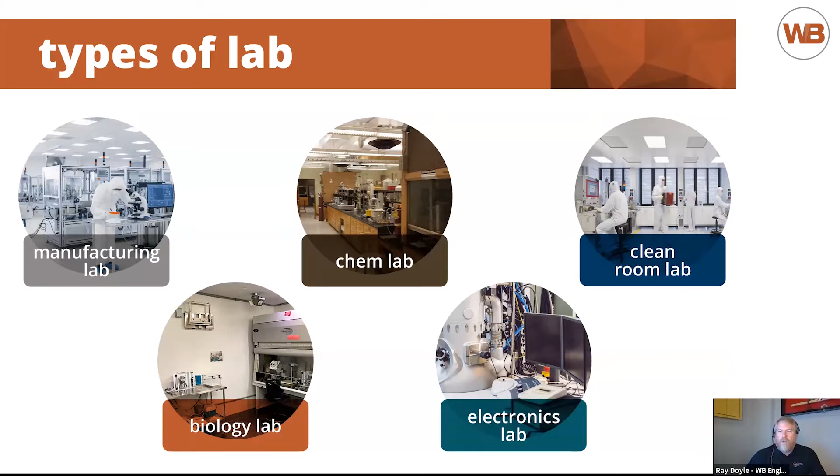So that brings us to the idea of understanding how tenants want to look at buildings, right? So why do we reposition an office building to a lab? Well, for people that own the buildings, they want to have a building that they can lease and make money on. Right now, with workplace in a little bit of a slow period, you want to try and find ways to reposition your buildings to increase their leasability.

The main thing that you have to remember is that when you're looking at a lab building, you're repositioning an office building to a lab to suit the needs of the market. So you have to understand the market. The market is a bunch of users on the science side that want to make sure they can do whatever they need to do to change their business and grow their business in the research, R&D, or manufacturing world.

So flexibility is key. It's really important that the folks that live in these labs and lease these buildings understand what they're leasing. To understand what they're leasing, they need to understand what type of flexibility, adaptability, adjustability, and expandability they have available in the building that they're looking at to lease.

So when you're repositioning a building, it's pretty simple to modify one use type, say from a tissue suite to a biology R&D space. But if you want to make it a chemistry lab from a biology lab, now you may have to adjust the exhaust systems.

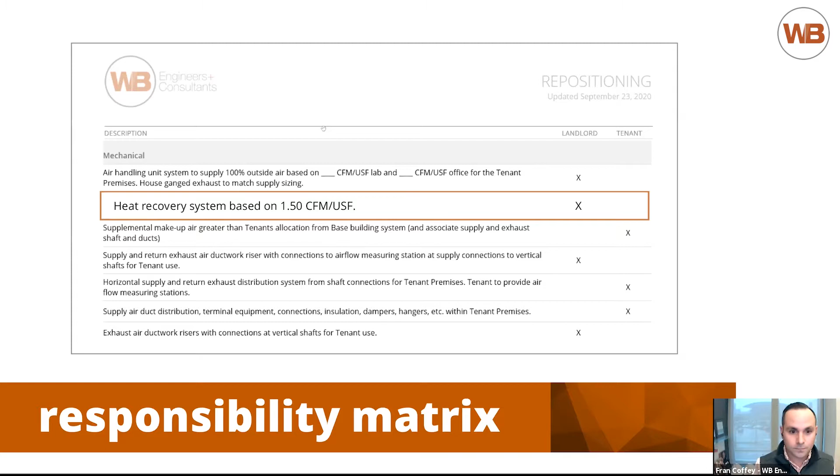Those are really good, important points there, Fran. We always talk about what's important to the tenant. And it's easy for us as building owners, and most of us really have a strongly rooted knowledge in how office buildings work. We all work in them. We either lease them or design them or build them. And it's pretty simple to say an office is just office space, conference rooms, cafeteria. There might be some ground floor retail.

That might be a little slow with COVID, but you may have that flexible space on the ground floor. And it may have additional amenities like a fitness center. And so those kind of building blocks, and I like the term master plan puzzle pieces because it helps me keep track of all these various configurations that you could possibly have.

The real change, the game changer when you convert that office building into a lab, is you start needing to figure out what you need to or can do to feed and service the science community, whether it's a life science lab or, in the case of the other lab types I talked about at the beginning, you get different levels of biosafety containment from 1 to 4. And those can be increasing in expense and increasing in complication and redundancy of systems.

So there's a lot of utilities associated with that. Chemistry is going to bring a lot of exhaust, so you're going to have a lot of elements that require additional exhaust systems and risers in the building. A vivarium is a very intense space that has a lot of air changes and a lot of additional criteria for redundancy and reliability. Cryo storage, you get liquid nitrogen tanks and freezers and different piping systems and different levels of hazard for containment and safety purge exhaust.

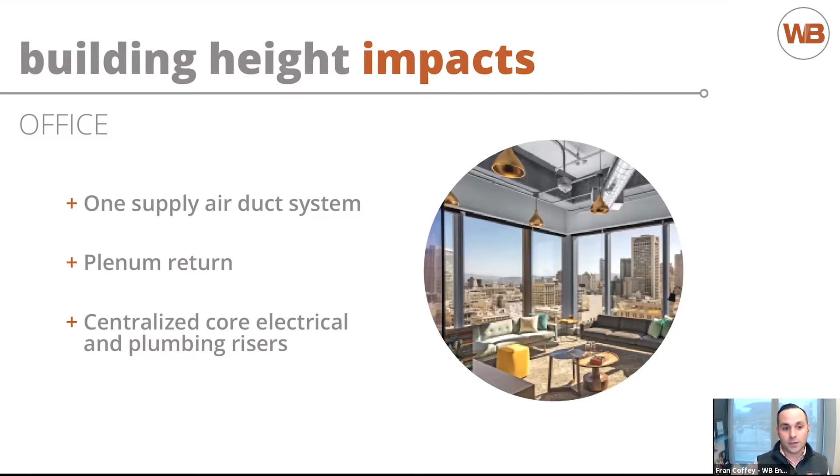So that's one of the things that we're going to compete with. It's one of our biggest challenges when we're looking to reposition your office space into a lab space. So as we get into that, we start thinking about the heights. We go in with a single ducted system coming out of the core of a main building, and then you're going to try to modify that to not only have the supply, but you need a ducted return, in some cases a ducted exhaust, and a lot more air needs to get moved throughout these spaces.

Likewise with the plumbing systems, there's going to be wet stacks all over the floor, depending on the type of lab, but you could potentially have wet stacks where you can't get the pitch you need to get back to the core, so you have to create new vertical risers.

So by introducing these systems, as Ray was saying, the master puzzle pieces that we need to think about and incorporate, this is where we can say, depending on your specific building and the geometry of that building and how it's laid out, maybe we need to create a new shaft outboard of the core so that we can allow that horizontal distribution to take place, and then that constructability can happen where we need it.

I was going to say that's really good stuff, Fran, and I think the biggest piece is compromise. Knowing that we talk about ideal floor to floors, right? We talk about what it would be if you're going to build a greenfield lab building, and then you kind of start to chunk back. Where are you? What's your office building floor to floor? Where does that fit into an ideal scenario?

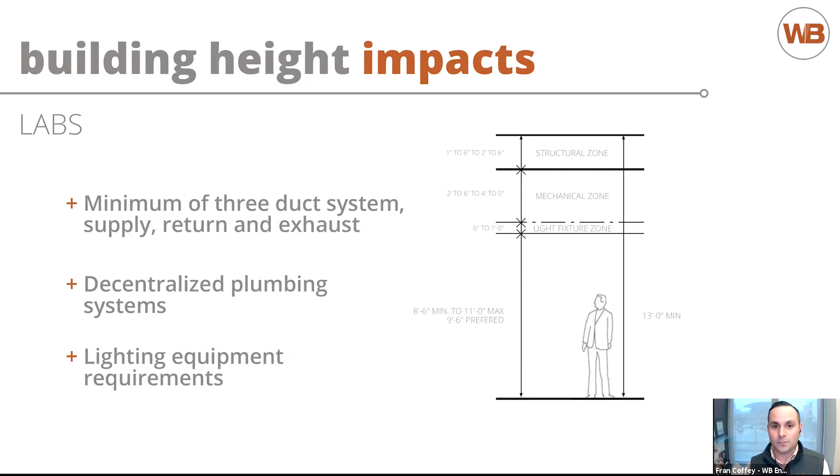So mechanical systems, we talk about these a little more when we talk about repositioning, mostly because they are the biggest element that impedes your progress, whether it's physical space for air handling units or chillers, or just ducts themselves in the ceilings or transmitting airflow from one floor to the next.

So this master plan puzzle pieces idea continues on, right? So in an office space, you're really just looking at envelope loads and interior heat gain, which is standard office equipment, right? You got a computer or a laptop, and you might have a printer every so often and a copier every so often. So those loads are very well known, and everybody understands what you're up against.

But when you get into a lab, you can get hugely varying electrical demand, and that electrical demand is driven by the mechanical equipment. So the actual heat gains in the space are defined by the lab equipment that the users need to house and operate to do their science. So you find yourself up against a large varying load. You could be anywhere from 6 watts a square foot to 30 watts a square foot in a lab heat gain, and that's a pretty dramatic swing.

You find yourself looking at specialty equipment that could be point load heat exhaust, and you might have a very high sensible load in a given equipment space, and you have to deal with that.

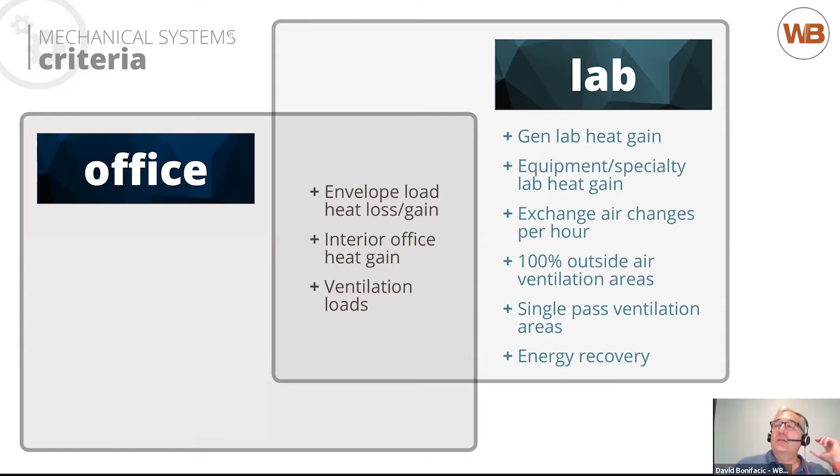I want to stick with the mechanical questions here. Does 100% outside air mean it's a single pass for general R&D? Do you recirculate? That's a great segue, Dave. I'm going to jump into that right now, if that's good. So speaking of that, there's different systems to think about going into the building HVAC concepts. And when you're converting the mechanical system from, say, an office space to a lab space, you have to think about what's the most important and how to build in that flexibility.

So as we go into these types of systems, the 100% outside air system is driven by the ventilation, or I should say the exhaust requirements for the lab spaces. So this would be a single pass. As that air goes into the space, it's one pass and it's on its way out. And this system could be just in a portion of the building, depending on how those splits are. Sometimes we're seeing 50-50 from office to lab space. Sometimes it's 60-40, whatever it may be.

But there's flexibility where you kind of have to understand what's driving the airflow, what's driving the load. So in going to a recirculating system where it might be more of a load-driven reasoning, this would be a recirculating system where you could actually have this air handler both serve an office space and a lab space. So you can kind of repurpose some of your, say, original base building systems, and you can use that flexibility and add onto it where you need to help support both spaces.

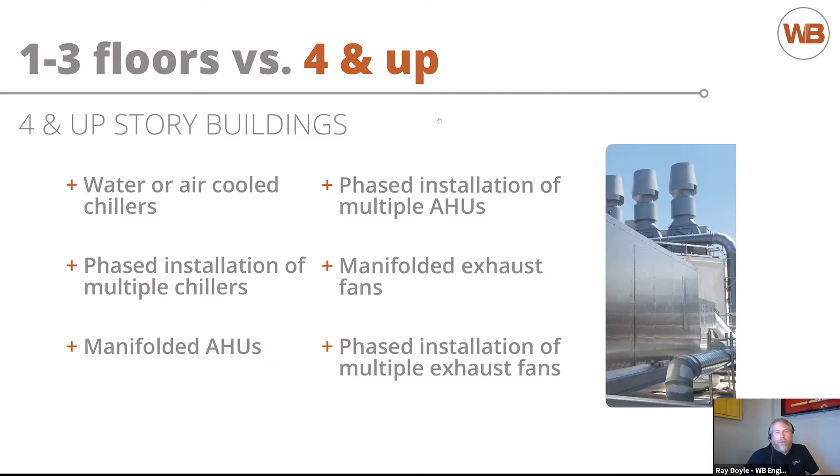So then we get into the electrical systems and thinking about what needs to get done, what needs to be thought about as we're trying to convert these, say, office spaces and office buildings into lab spaces. So, typical office space, there's not too much, normal power distribution. There's life safety power typically in the high-rise buildings.

When introducing a lab, there's some other things to consider. Some of the power is legally required to have the backup power in place, and that's outside of, let's say, the life safety. There's standby power, UPS power, medium voltage power, and then some people care about power quality.

So, at this point, this is kind of where we like to look at the responsibility matrix to figure out what makes sense to put in day one and what makes sense to defer that cost to the tenants. Because you don't want to start putting in centralized UPS and running power all over the building for some tenants that might not have that requirement. But it may be a good idea to invest in a standby generator so that that's in place and that will be attractive to a potential lab tenant.

And then another thing when repurposing office space into a lab is the actual distribution. We did this one project in New Jersey where they didn't have a typical bus duct riser. It was just conduit feeds from the main switchgear up to each floor with disconnects. So in that scenario, that worked for the office building because office loads are pretty consistent from space to space.

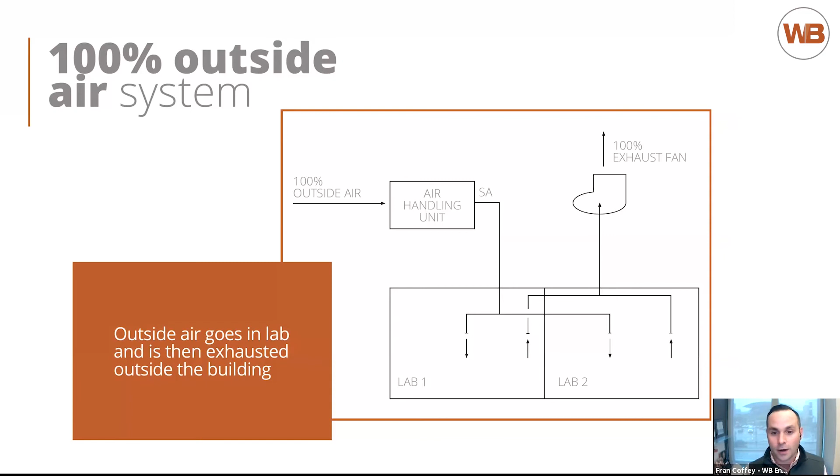And I think the other piece of that question is what's driving that. I kind of touched upon that a little bit, taking a look at what's driving the amount of air we're trying to pass through here. Sometimes, like in a chemistry lab building, it's going to be that amount of exhaust air and the makeup air required to keep the building pressurization in line. Whereas, if you went to a single pass, it might be more of a load-driven requirement that's going to drive how much air needs to get into the spaces.

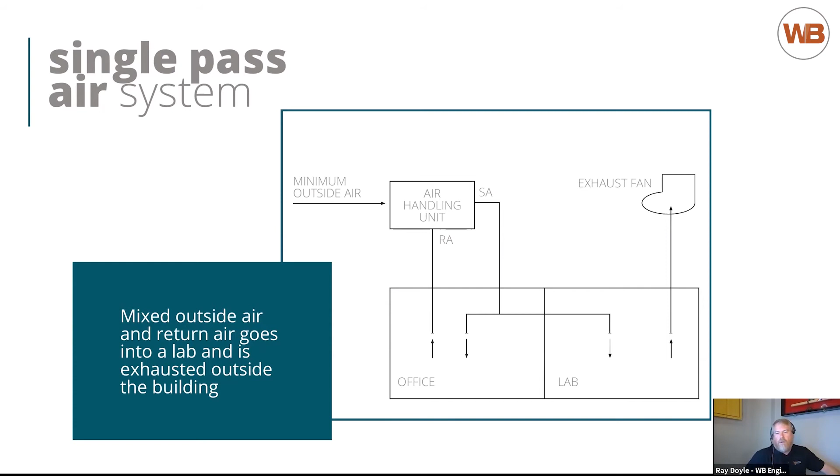So that's really the main point. Containment for exhaust-driven spaces will drive 100% outside air. So when you have 100% outside air, it's typically exhaust-driven, and when you have a single-pass air system, it's more load-driven, or a higher percentage of the building is load-driven, and then you try and optimize energy based on coordination with your tenant and building owner and your cross-contamination concerns, and then you make the decision to do more single-pass.

All right, I'm going to keep driving this here because I want to make sure we have enough time. Running up against the wall here on time? Yeah, no, I think we're doing it. Yep, go ahead. No, that's good.

So in the office building, we talk about just ROM numbers. These are variations across the country, and generally there's a pretty good range. But for a 40 to 100,000 square foot office building, you're going to range between $200 and $300 a square foot, and your fit outs can range between 80 and 130. There's outliers in both cases, depending on the skins of your building and how expensive your finishes may want to be inside. But it's a pretty solid range in the middle.

So when you get to labs, you find yourself in the same categorization of building size, and you really aren't spending a tremendous amount more money if you're going to build a building from a core and shell standpoint, from $200 to $400 a square foot. And the reason it's not a lot more is you're not typically going to buy all of the infrastructure. You're just buying heavied up structure.

You're creating a master plan of puzzle pieces that allows you to do shafts and openings where you need them in the structure, but you're not buying all of the mechanical systems. You're not buying all the plumbing systems. You're not buying all of the electrical gear in a lot of cases to fit out the labs. You do that once you have your tenants on board.

And that's why the tenant costs can range considerably, and they can also increase in cost. But we do that in most cases in our conversions to make sure that you can defer your capital investment to the tenant once you have them on board, and you can include all of that in their TI. And that TI would be based on the science that they're doing. So one tenant may be a simple BL1 R&D lab, which you can do relatively inexpensively.

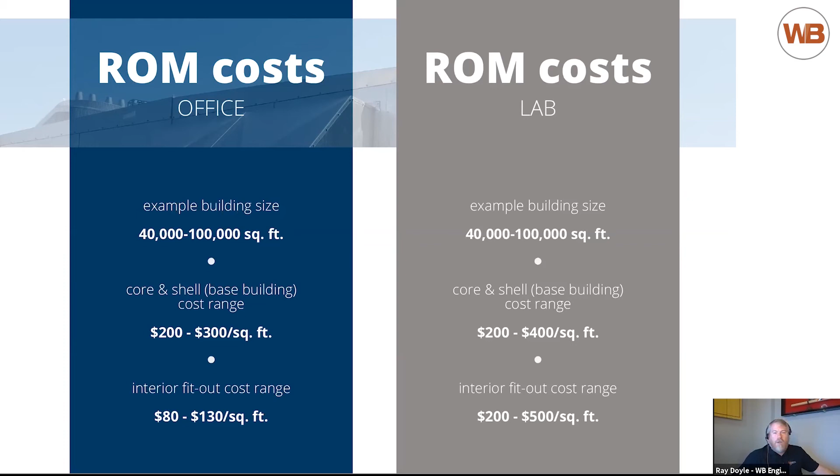But if you get into BL3s or BL4s or manufacturing with clean space or high-end equipment, you could see how quickly you could jump even past the $500 a square foot mark. I've seen labs in the range of $800 to $1,000 on the very high end. So those things need to be considered when you're working out your leases and understanding what the conversion is going to be.

This case study is just to give you guys a simple base load on a typical floor plate in an office building of a 30,000 square foot building. Not absolute worst case, but in most of the retrofits from office to lab, you're going to see something in the range of about 50% lab, 50% office. And in the lab, we're going to range about 2 CFM a square foot for heat load with a ducted system. That'd be different if you were doing DOAS with chilled water.

But again, worst case scenario for space constraints. And then 1 CFM a square foot. And the thing we want to make sure we account for, and this is important when you talk about your master plan for your conversion, you want to consider about 1,000 CFM of exhaust per about 1,200 square foot of lab space. These numbers can vary a little bit, but you also want to make sure that you don't exclude tenants that have lab exhaust requirements.

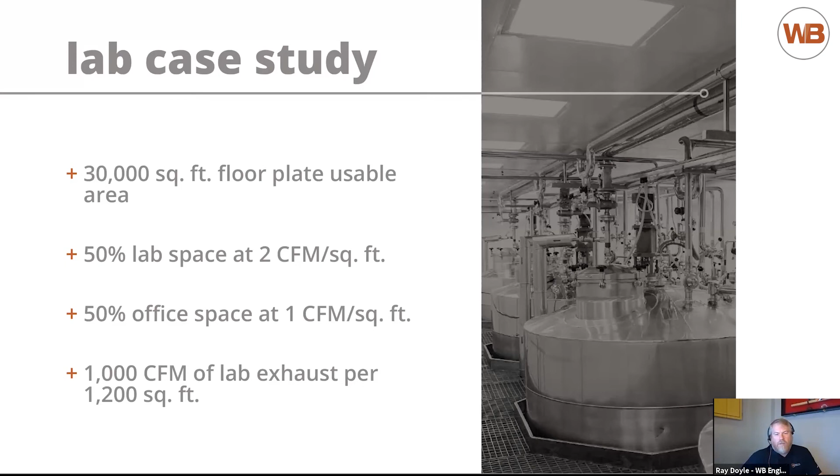Most biology companies have a fume hood every 1,000 to every 2,500 square feet. They have some need to do chemical process. So this is just simple diagrams to understand how in an office space in the lower level, you're going to have a supply and exhaust riser in the middle. In a typical office building with a rooftop unit, for example, you're going to have a supply and exhaust. You'd have a VAV loop, and you'd have general plenum return, as we described at the very beginning in an office space.

In contrast to that, you look at the lab configuration. If you go airside solution, you're going to find yourself with sometimes twice as much supply and exhaust space, so maybe twice the risers. And then you're also going to have some dedicated exhaust on the perimeter. And the reason we push these out to the perimeter in a conversion is the reasons that Fran talked about at the beginning, this idea of trying to finger systems together so that you don't have the exhaust risers at the core.

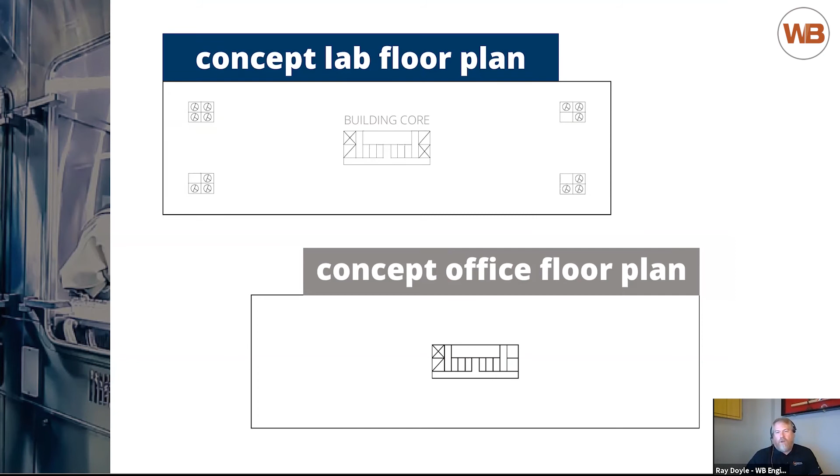Because if you can imagine crossing the 3 or 4 major duct systems, if you have a hazardous exhaust, a lab exhaust, a return duct, and a supply duct, 4 duct systems trying to come out of here and serve 30,000 square feet, you'll never get there. You'll have no ceiling height at the core. It gets really low ceilings and really complicated bulkheads. So there's a lot of challenges. And then all of our architect friends will be very mad at us, and we don't want that.

Another thing to think about too is the code. Luckily, Andy Shanahan started our code consultant group about a year ago, and we've been very lucky to benefit from having him and leaning on him. So the typical building life safety codes apply to lab spaces in general. It's good to understand NFPA 30 and 45, which is a little more stringent. Every building's different, so everything needs to get analyzed and assessed.

Some of the things to be mindful of is when you are thinking about going to a high-rise building, the higher you go up, the less flammable storage you can have. I believe if you go from like the ground to the first floor, it's like 40 times. You can store 40 times more flammable storage down low than you can above 4 stories. So as you get into that, you're definitely limited. But once again, that's another one of those puzzle pieces that you need to think about, understand and define up front, so then it can be planned for.

So as Fran said, you get into this idea of hazardous exhaust, and really it comes into this category of fume hoods or hazards. And you need to make sure when you do these conversions, you have an understanding of how many of the floors you want to have the capability of storing chemicals, and how much you want to have the ability for your tenants to have hazardous exhaust.